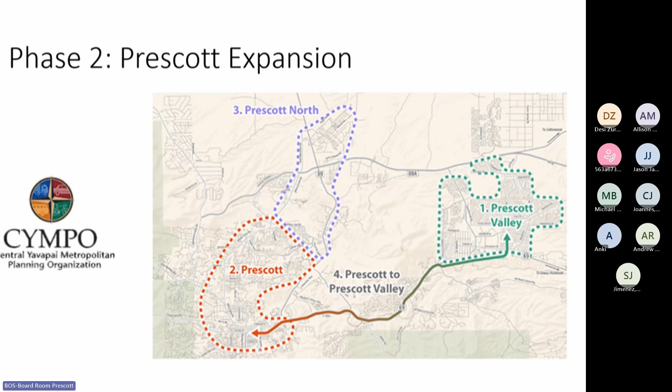So as I mentioned, this is the YavaLine Regional Transit System. The nickname is the Yav Connect. There's a little logo right there on the top right.

Our service is going to be the same as in Prescott Valley, Monday through Friday, 6 a.m. to 8 p.m.

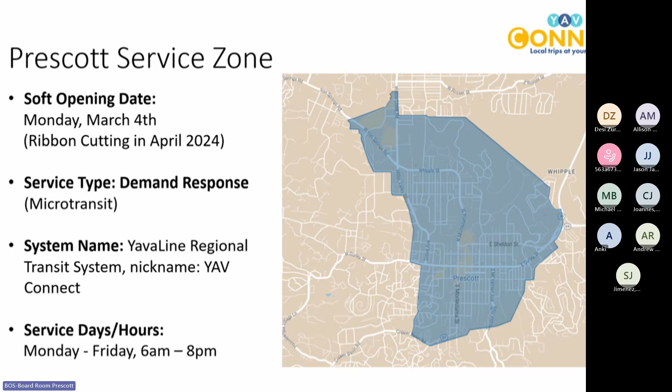Here's a little bit of our fleet. I know there's a lot of questions around the topic of the fleet and how big the vehicles are going to be. As you can see, it's very non-invasive, it's your average vehicle of 6 and 9 passenger vans. All of them are wheelchair accessible, ramp equipped, all to provide services for people with disabilities. So they're ADA compliant, and we're going to start off with 2 to 3 vehicles here in the zone.

Along with the demand aspect of it, or demand driven, is kind of the brains behind the service, which is the software. So right now we are running our service with Via Mobility. You can actually download it with this QR code and get the latest Yav Connect app.

This app is going to service both Prescott Valley and Prescott, and that's where people can request their trips, book their trips ahead of time or on demand. People can also call our service number: 1-866-YAV-TRAN. Here's just a couple more pictures of what that looks like to give you an idea.

As you can see, it's fairly straightforward. You put your destination in, credit card information, or you can pay on board. That's the other neat part of this, for those that are unbanked, they can pay on board via cash. So a little bit right there and book your ride - that's what our app looks like. So I'll hand it over to Leslie for some marketing information.

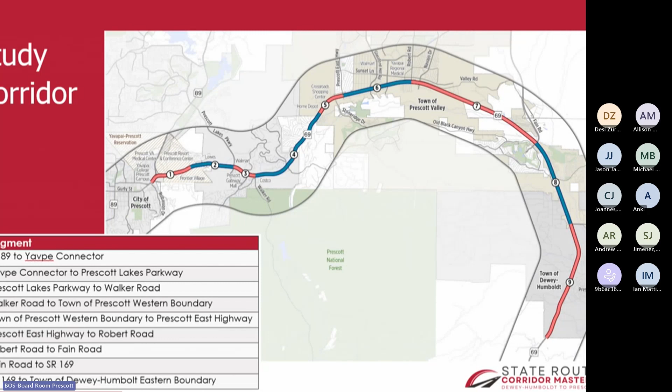So we ended up with 9 segments. I'm not going to go through every segment in the interest of time, but over the next few slides I'll touch on a few segments and what we've identified initially.

I also wanted to bring a regional perspective to this corridor. I know I'm preaching to the choir, but 69 is one of the only corridors that connects three different communities and the county. There is an alternative route from Fain Road to 89A to 89, but 69 still is the predominant corridor that provides access to a lot of the regional activity centers located along State Route 69.

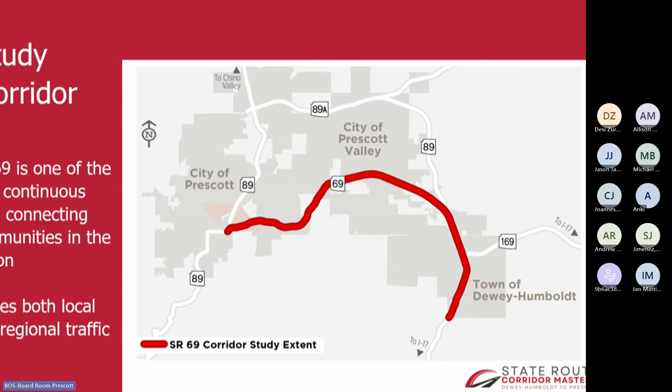For the next few slides, I'm going to summarize the existing conditions assessment in three aspects: reviewing land use and development characteristics along the corridor, travel patterns in terms of who's actually using 69 and where they're coming from and going, and finally the roadway inventory along 69 along with some initial analysis results.

Looking at corridor socioeconomic conditions, it's pretty diverse. There are high density areas up in the Prescott and Prescott Valley area, and some other areas along corridor segments 4 and 8. But a big chunk of the corridor is rural in nature or doesn't have much development along it. Where there is development, it's pretty concentrated.

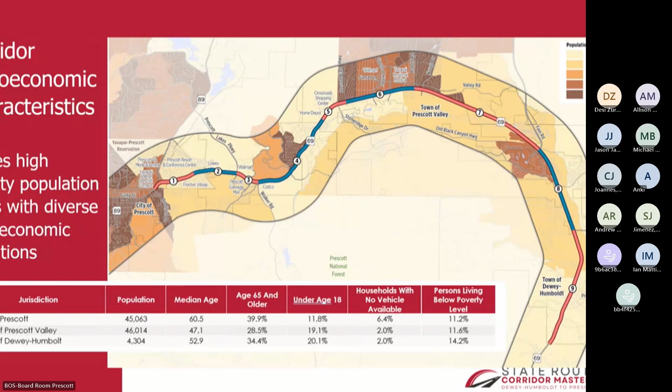We also looked at land use characteristics along the corridor, and depending on the land use, how people use the corridor varies. No surprise, there's a lot of commercial use in Prescott Valley along the front of 69, and the same in the Prescott area along the Prescott Mall and the west side. The key thing I want to bring up is the number of key activity centers located along this corridor: Yavapai College, Prescott Resort, Frontier Village, Prescott Gateway Mall, Costco, Crossroads Shopping Center, and Yavapai Regional Medical Center. These aren't just serving people who drive that corridor — they're regional activity centers, so people from throughout the region are accessing them. That's why 69 is so important.

With the next couple slides, I want to shed some light on how people are using 69, where they're coming from in terms of origins and where they're going in terms of destinations. But before I do that, I wanted to provide a snapshot of what the traffic volumes look like so you can relate the OD results a little bit better.

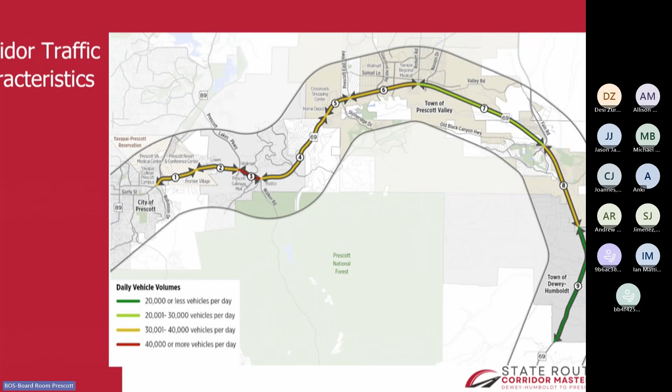Segments 1 and 2, essentially from 89 on the west to about Prescott Lakes Parkway, traffic volumes vary from 20 to 30,000. The busiest segment is between Prescott Lakes Parkway and Walker Road, where you have the Prescott Gateway Mall and Costco, and that segment carries well over 40,000 vehicles a day. The section east of Walker Road up to the Prescott Valley western city limits is about 30 to 40,000, and further east within Prescott Valley again about 30 to 40,000. As you go east of Navajo, traffic volumes start to drop to about 20 to 30,000, and further east of Dewey Humboldt to about 19 to 20,000 vehicles per day.

As we look forward to what kind of improvements we need, do we need to do everything on 69, or do we need to do some things on adjacent roads? That's the way we want to make sure we solve the problems on 69. Just merely addressing 69 may not help us get there, so we wanted to do a very detailed analysis on where people are coming from and where they're going.

We did this for all 9 segments, but in the interest of time I'll focus on 3. The first is the west end by Prescott, going from 89 to the Yavapai Connector. As you can see on the top slide, for folks going eastbound on this segment, 53% of that traffic is coming from the West Prescott area, to the west of 89. Most of that traffic is going towards North Prescott Valley, about 34%, and south of 69 in Prescott Valley, about 13%.

Another key metric is the amount of traffic that is regional in nature, heading towards Phoenix, about 9 to 10%. So there's a significant percentage of traffic that's regional, but also a significant amount serving local needs. At the same location, looking at westbound traffic, the pattern essentially flips. From the Phoenix metro area, traffic using that segment is about 9% again, but a lot of Prescott Valley folks are heading towards Prescott, about 36%.

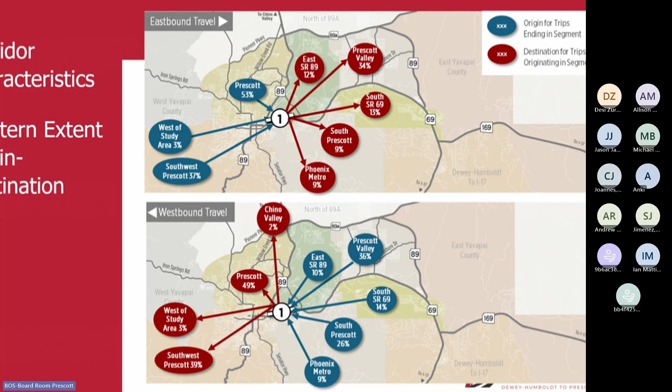How did you determine those? We used Replica, a big data platform. That database provides access to cell phone data and other sources to basically determine why people are making trips, where their origin is, and where their destination is. We divided the region along the corridor into 7 or 8 different zones, then within each zone we grouped all the trips and saw where they went. That's how we used Replica. We didn't have this level of technology and data before, so this helped us really hone in on where they're coming from and where they're going. Appreciate the clarification, I think it was important to touch on for the public. Thank you.

The second one I want to touch on is segment number 3, again one of the busiest segments by the Prescott Gateway Mall and Costco area, between Prescott Lakes Parkway and the Walker Road intersection. Still, as you're moving towards the east side of the corridor, there's a significant chunk of trips originating in the West Prescott area, about 45%, and they still seem to be headed towards Prescott Valley, about 37%. So what this is indicating is these are long distance trips, people going all along 69, a significant chunk making that long trip from Prescott to Prescott Valley.

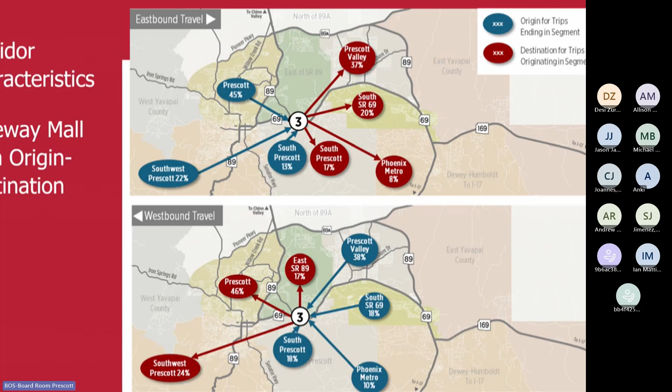Once we did the OD analysis, we also wanted to make sure what the traffic analysis is saying in terms of today's traffic. So we did an inventory of all the traffic control along 69, and there's about 26 traffic signals. Segment 2, east of the Yavapai connector, has 4 signals within two-thirds of a mile, and segments 5 and 6 have 7 signals within 2.2 miles.

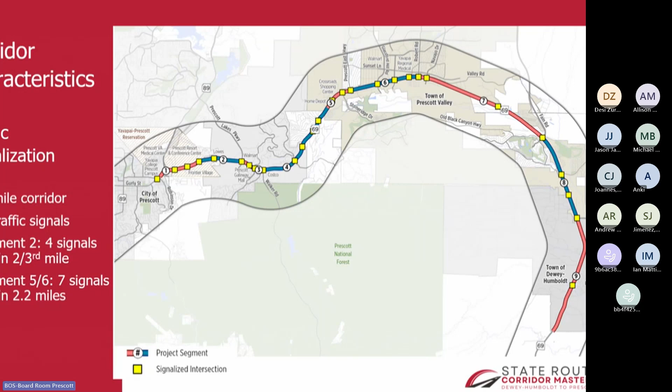Another thing on the signals is that several signals have very long cycle lengths, so especially for the cross streets, people seem to experience significant delays. Those are some areas that we could look at improving pretty easily.

Also, as I mentioned, we did the inventory of the corridor. We captured the number of lanes in each direction, as well as the medians. It's not consistent, it keeps changing from one segment to another, from 6 lanes to 5 lanes to 4 lanes to 6 lanes. It just varies significantly. What happens then is, as you're going from 6 lanes to 5 or 4 lanes, those become choke points and add to the problem. Our goal is to look at this even more carefully to identify bringing consistency for certain segments, what that would look like, and whether that would improve the situation.

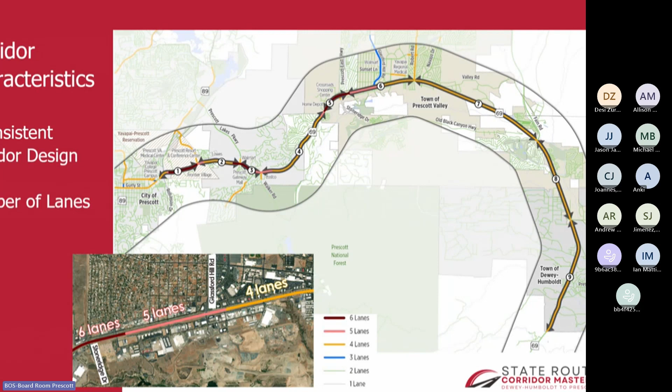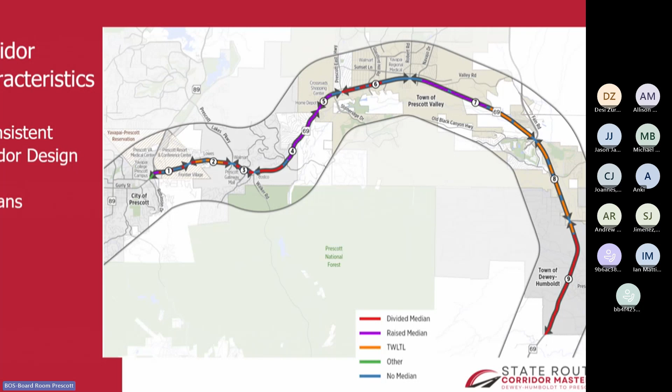Medians are another aspect, as you can see in that map. There are several types of medians throughout that corridor, and they're all inconsistent as well. So bringing some level of consistency for the medians throughout the corridor, focusing on some segments, making the medians very consistent, kind of improves the overall traffic flow. Again, that's low-hanging fruit that we could do to buy some time while waiting for the growth to happen and traffic volumes to increase further.

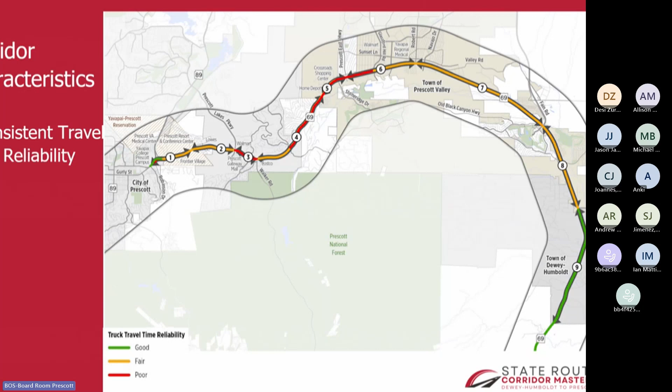We also looked at it from a truck standpoint, typically we look at whether the corridor is considered reliable from a travel time perspective for trucks. There's a pretty big chunk of the corridor where trucks consider that segment not reliable from a travel time standpoint, meaning that if it should take you 10 minutes, it takes you 20 minutes, and it's not consistent. That's what travel time reliability means. From a truck standpoint, it's classified by corridor segments, and some of them are classified as unreliable.

We also looked at safety data. A lot of it came from the NACOG, CYMPO, and Metroplan safety plan. Again, our focus was along this corridor, and we looked at the 5-year crash data.

There were 12 fatal crashes, 4 that were bike and ped, and 45 serious injury crashes. The safety plan identified two segments as high crash segments: Prescott East Highway to Robert Road, and Prescott Lakes Parkway to Walker Road. These coincide with the traffic volume data as well, being the two busiest segments along the corridor.

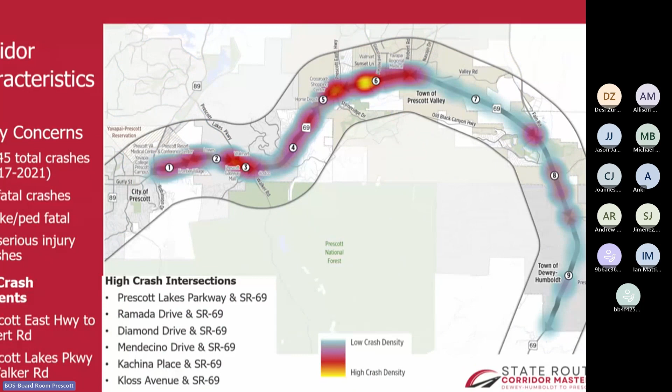Chairperson, if I can, please. Vamshi, we had two comment cards come in that I think this would be the most appropriate time to ask. One was from JD, who did not wish to speak, and one was from Joanne, who did wish, but they were both on the same point. This is as it relates to wildlife characteristics in the corridor. I know historically staff has tracked through the safety part of it, any crashes or fatalities related to wildlife. Could you speak to that from the safety standpoint, and is the planning process looking at any wildlife characteristics in the corridor?

Yes, that is a fatal flaw review that we will be looking at, to make sure we are addressing environmental concerns as we move forward. So we'll be looking at the wildlife corridors to make sure they're not getting obstructed, and the preferred alternative set of improvements will address both safety and environmental sensitivity. Thank you.

Again, we are looking at the corridor from a multimodal perspective, so we did an inventory of all the pedestrian and bicycle facilities along the corridor. While the map makes it look like there's a pretty good amount of walking and biking facilities providing access to the activity centers on either side, what's misleading is they're not fully connected.

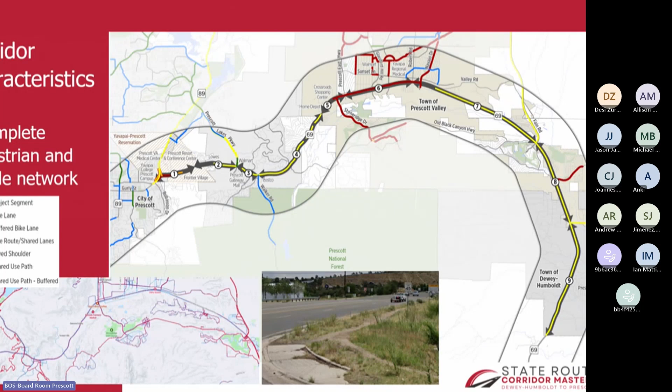So closing some of the gaps, like in sidewalks, shared use paths, or bike facilities, would make a huge difference in how people actually start using these for walking and biking. As we look at the final footprint for 69, we will also be looking at what we can accommodate in terms of sidewalks, shared use paths, and biking facilities.

That's a quick summary of our progress to date. We are wrapping up working paper 1, summarizing all the existing conditions analysis, and we've just started our future conditions analysis. As part of this, we'll do a lot of future modeling to determine the no-build scenario, then look at what kind of improvements will make a difference to address the issues. At the end of the day, we'll develop an action plan with a short, mid, and long set of improvements that CYMPO can champion after the project finishes.

I want to do a quick shout out for the community engagement that just kicked off. There are comment cards on the sign-in table, and folks can scan the QR code with their phone to go to the survey website. After filling out the survey, it takes them to an interactive map where they can provide location-specific feedback. With that, I'll open it up for any questions.

Thank you, Vamshi, that was a nice synopsis of what you guys have been up to. I admit I've been wondering how it's going, so clearly you've gone through a lot and looked at a lot of the data already. That's very much appreciated. I'm looking at the CYMPO website right now. For those who get home and forgot to scan the QR code, just go to the CYMPO website, and right at the top it says State Route 69 Plan, and on that page there's a link for it. So encourage it, share it with your friends, we're all looking for public feedback as much as possible. I know this project, along with the Sundog Connector project, has garnered a lot of public interest, so now's your chance, people. Appreciate it. Thank you, Dan.

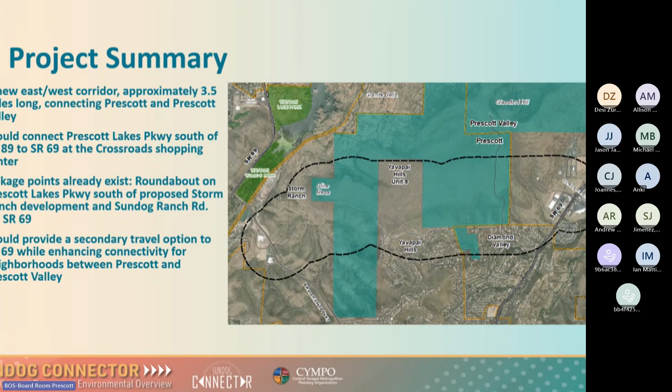When we looked at the process for this project here, we broke it into 4 different phases. We started with phase 1, which was looking at our existing and future conditions. We then moved into phase 2, where we came up with our different alternatives and evaluated each of those to determine what build type alternatives would make sense for the region and could be moved forward for further evaluation. After we moved out of phase 2, it was into phase 3, where the actual preparation of the DCR and the environmental overview took place. And then it takes us into phase 4, which is here today, the presentation of the plan.

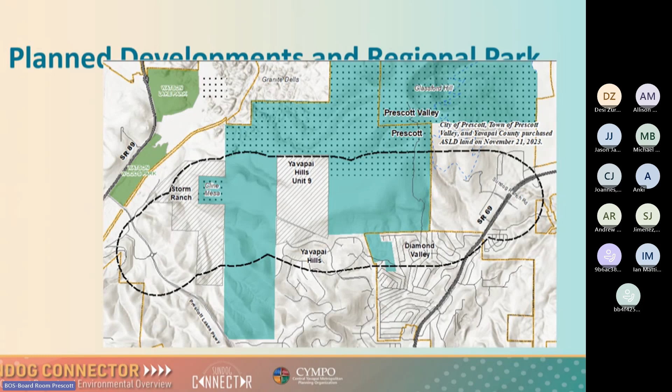So when we start talking about some of the proposed build alternatives that we could look at, and I'm going to turn it over to Kate here in a second, we talked about some of the tiered approach as we developed the build alternatives.

As those build alternatives were developed, we then went into a process where we evaluated each of the alternatives based on determined different evaluation criteria categories.

So looking at different items such as the natural environment, the built environment, traffic, accessibility, emergency access and evacuation, multimodal, vehicular safety, and any of the engineering or design constraints, costs, and overall public and stakeholder acceptance.

So with that, I'm going to pass it over to Kate to discuss some of the actual alternatives and how we move through some of that process.

Thank you, Matt. So as Matt mentioned, we started with 7 alternatives. There are a couple things that I do want to note that were on the last slide when we talked about the planned improvements and the planned developments and the planned proposed park. So those were all considered, as Matt said.

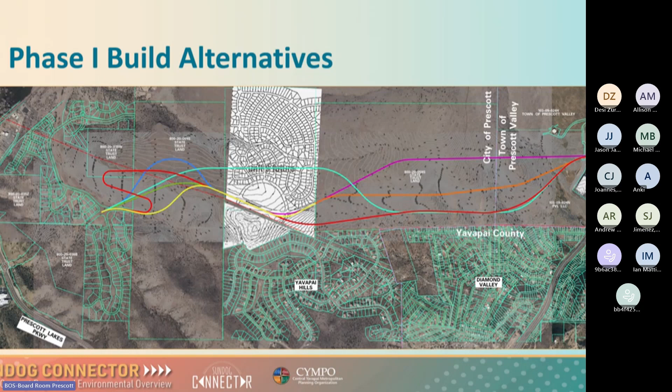We then took those 7 alternatives and did the evaluation. We did a lot of math, a lot of quantitative analysis. We have environmental concerns, and a lot of those criteria came from what we heard from the stakeholders and the public, which were key and would drive it. As you can see, alternative 1 and alternative 2 really fell out — the red or orange color is really poor performing. The best ones are in blue, so alternative 3 and alternative 7 are the 2 build alternatives that moved forward.

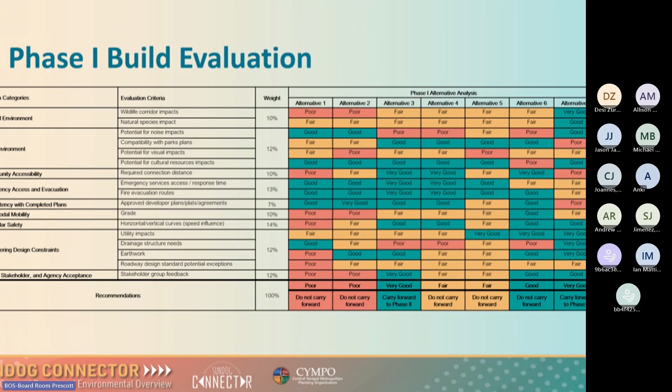Again, phase 1 was just trying to look at, if we build this, where is the most optimal position for it? Alternative 3 connects all the way through. Of the 7 alternatives, alternative 7 only went to the eastern end of Yavapai Hills, so it doesn't connect all the way through, but it would provide that connection to Prescott Lakes Parkway. So alternative 3 and alternative 7 were recommended to move on to phase 2.

In phase 2, when we first started, we took a step back and met with the technical team to figure out what the actual typical section should look like. Based on traffic volumes, and working with Vamshi — our SR69 team and the Sundog team are working hand in hand the whole time — we looked at what it would look like given end of traffic volumes. So we have a 4-lane section for phase 2, with a 10-foot multi-use sidewalk pathway on the north side, and a 6-foot sidewalk on the south side.

To be conservative with this approach on all alternatives, we used cut slopes and fill slopes on both sides — a max cut of 1.5 to 1 and a max fill of 2 to 1. That means we didn't consider using guardrail on some fills to steepen the slopes so we wouldn't go out as much, nor did we consider using walls on some cuts to avoid going out as far. We just treated them all the same. So to be conservative, all the build alternatives, including in the plans where we show the right of way, used this approach through the whole area. If it ever moves on to further design, that's something that would be looked at then.

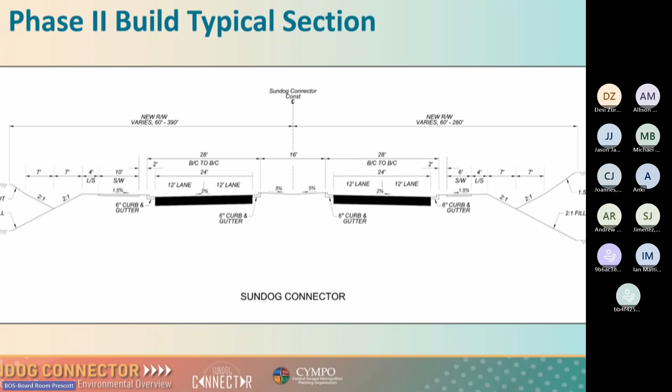For alternative 3, we also looked at the horizontal and vertical alignment and tightened those up, going into a bit more depth. We tried to pull it away from the existing homes in Yavapai Hills and Diamond Valley as much as we thought we could, while still getting the benefit of putting it to the south. The benefit of putting it to the south is in the vertical — we're able to stay within the existing topography and follow it more easily while meeting desirable and minimum grades. That's on the southern side, but we still tried to push it away from those existing backyards as much as we possibly could. That was part of this refinement.

The other part of the refinement you can see is the connections. Where do we connect? Where could those connection points be into the communities that are existing today? So the Yavapai Hills community follows the kind of plats that we've seen. And even if you look at an aerial where they kind of have the grading already done for south of it, is following those two lines. So that's where we are showing those connections.

With Diamond Valley, we evaluated where would it make the most sense to go into there. And that is actually one of the existing, there's a dirt road that comes out of there. And it seemed like it really connected the two sides of that community and an easy way to get out. And then it could be extended to the north to provide access to the utilities that are north of there.

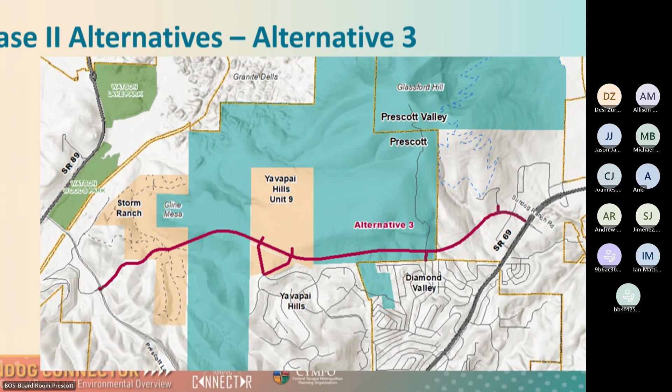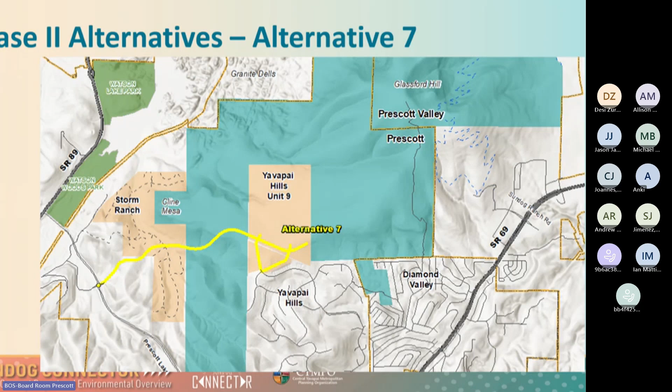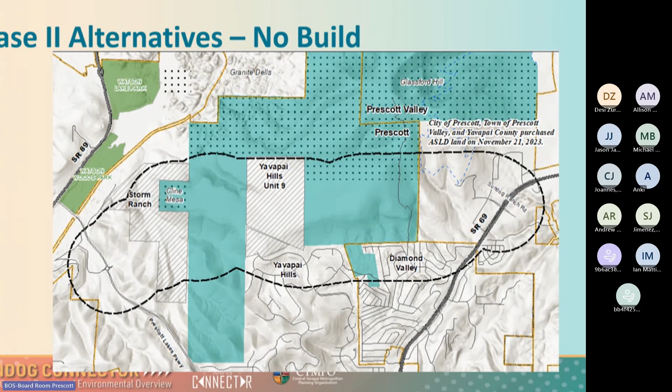So that's the refinements on alternative 3. On alternative 7, we did similar refinements, but really centered on the connections in Yavapai Hills itself with those same connections. And then the no build is the no build. The way we're evaluating it is a no build of the whole corridor that is not taking into account - this is just if those communities didn't move forward either, which we have no control of in the evaluation - what would it score in the different scoring?

So how we came up with that weight was through interactive activities with the stakeholders, which included members of the community, members of different agencies. Each of the towns and cities were represented in there. So from that, we did activities in our stakeholder 2 workshop, and that's where we came up and had them rank what would be more important, cost versus multimodal, and did a lot of that. So again, all of those activities that we did within the public and the stakeholder engagement were directly input into the evaluation and the process that we went through.

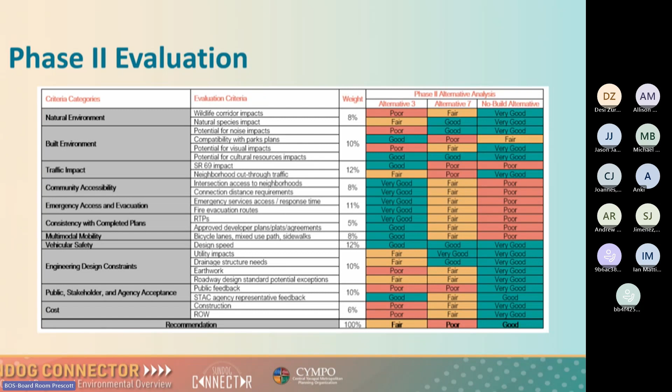So alternative 3, the opportunities. We're going to go through each of the two that were recommended and the opportunities and the constraints. So it most meets those future and existing regional needs, provides the largest reduction in travel times and volumes on SR 69, which I'll get into in a little bit in a minute. It provides the most direct connection along the western side. So when I mean that, it means between Storm Ranch and Yavapai Hills, it's up and over.

One thing with this, I will say, alternative 3 versus alternative 7 had a different connection in there. This one used cut, the other one used fill. And so the cut, you don't see as much as you would the fill, if that makes sense. And so it scored better, but it ended up being more expensive also. So that's just something, if this ever did go further, to consider.

So that's something I wanted to point out. It provides the opportunity to limit impacts and maximize connectivity to the proposed regional park trailheads.

We did meet with both the town and the city on the proposed park, asking if they saw the roadway as a benefit to the park, and which of the alternatives—we had all seven at the time—would be most feasible. Mostly it was on the eastern end that made a difference, where from a topography standpoint you could connect in and provide a trailhead. They did see it as a benefit for getting a southern connection and a southern trailhead, and that's what that bullet point is talking about.

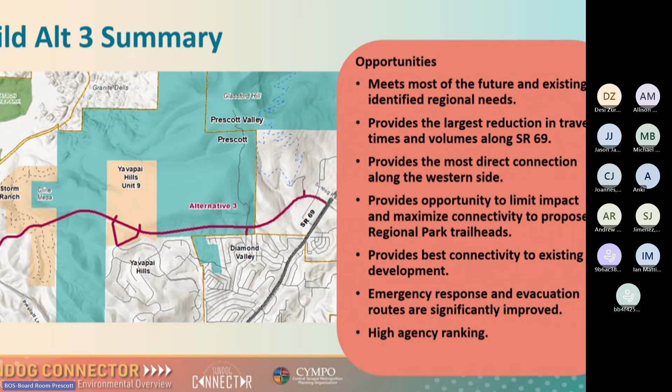It provides the best connectivity to the existing development. A lot of the other alternatives are farther away, so it's harder to get there—you'd have to build another road through topographic features to reach it. It also improves emergency response and evacuation routes, and has a high agency ranking.

As for constraints: there's about 500 feet of tall hillside excavation on the east side, and a pretty big excavation on the west side. So that connection between Storm Ranch and Yavapai Hills has a lot of excavation in there—it's a pretty big cut. There are some steep roadway segments, short ones, that exceed about 9% grade.

There's potential noise impacts—this is really directly from what we heard from the community and the public. They're concerned about the noise, so there are potential noise impacts due to the proximity of existing properties. There are also potential roadway design standard exceptions that would be required if implemented.

It intersects wildlife corridors—any build alternative will do that. The alignment is visible from multiple viewpoints in Yavapai Hills. And then there's a possibility for cut-through traffic—lower than alternative 7, but still a possibility.

The majority of the public input we received, the majority of comments, was not in support of this build alternative, or a build alternative in general. It's also the highest cost of the build versus no-build options.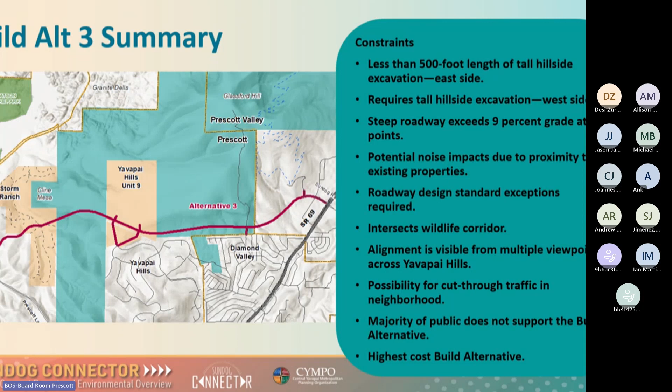The no-build opportunities: it leaves the natural land undisturbed, maintains current noise and visual characteristics, and maintains current wildlife corridor connections. The majority of public input we received supported this no-build alternative. There are no added costs for right-of-way or utility needs, since you're not buying right-of-way to build a road anywhere, and there's no possibility of cut-through traffic in the neighborhood because no road is being implemented.

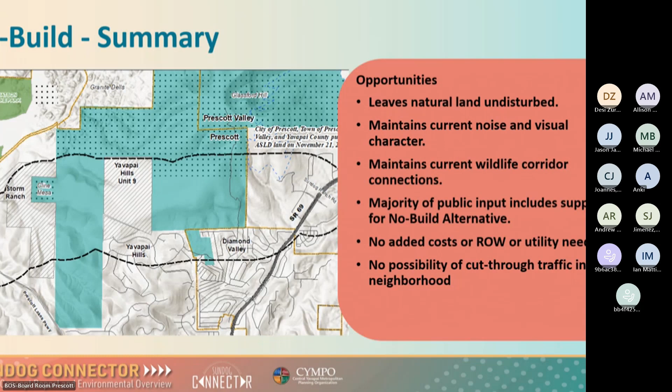Constraints: it doesn't address emergency response times exceeding the recommended standards, and it doesn't improve evacuation access. It doesn't address congestion in this manner—as SR 69 moves forward in that report, there will be other ways it looks at addressing that congestion. But in this manner, if no-build stays, it would not address that congestion.

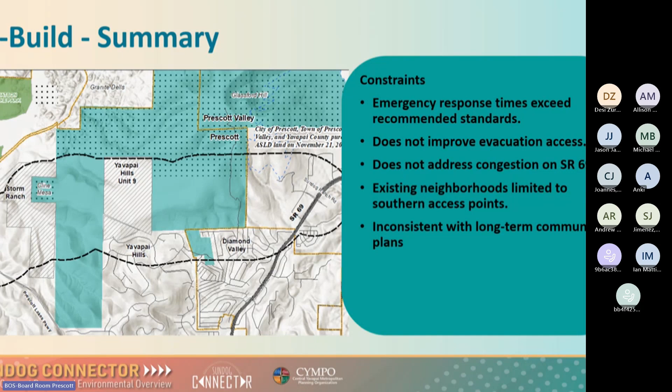Existing neighborhoods are limited to the southern access points—they can only get out through that southern access—and it's inconsistent with the long-term community plans.

So what does it look like? I showed it already, but here's a nice graphic. It has two lanes in each direction, a 16-foot median, a nice multi-use path on the north side, and a 6-foot sidewalk on the south side with natural landscaping, which is what's recommended if the build alternative ever gets implemented.

From a build alternative standpoint, it's recommended to be classified as a minor arterial roadway with a posted speed of 35 to 45 miles per hour. It has a desired max grade of 6%, with up to—though not quite reaching—10% for limited distances along the corridor. And as mentioned, a fill of 2 to 1 max and a cut of 1.5 to 1 max in that rock cut.

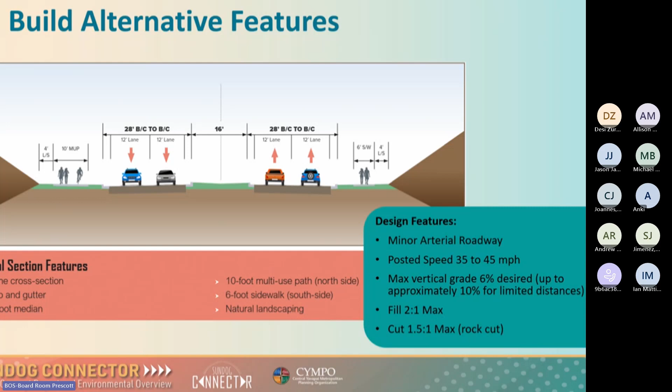Some traffic features - again, we're working hand in hand with the SR 69 study on what the volumes would look like. The models projected around 17,000 vehicles in 2050 would utilize it, and then there are daily projections on Sundog.

In some of the segments on Prescott Valley, traffic would go down from 20 to 25%. On SR 69, compared to the no-build, we're looking at a 20 to 25% decrease, I think around segment 2 or 3 - is that right? In your presentation earlier, around segment 2 or 3.

There is a slight increase in traffic north on SR 69 near the connection. That's because the connection not only takes SR 69 traffic but other routes too - people are taking Fain or using 89A to go around, which makes SR 69 north slightly increase because there's another way across now.

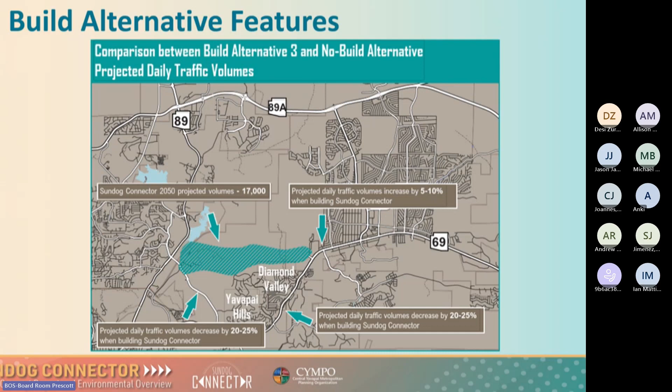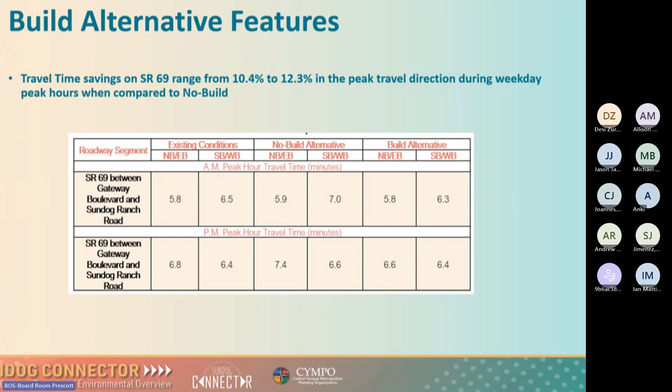We also looked at travel time savings in the peak direction of travel during peak time periods, ranging from about 10 to 12%. We looked at existing conditions, the no-build alternative, and the build alternative. The actual numbers show the build alternative brings it a little bit better than what we see out there today, but that comparison is for if we don't do anything. Other improvements will be evaluated in the SR 69 plan.

From a cost perspective of the build alternative, we broke this down into 5 segments. Segment 1 is from the roundabout to the eastern end of Storm Ranch. Segment 2 is between Storm Ranch and the extension of Yavapai Hills, and Unit 9. Segment 4 is from the end of Unit 9 to the limit of the town, and segment 5 is the town's segment to the end, using that jurisdictional limit between 4 and 5.

Segment 1's cost is approximate because we didn't design that area - you'll see in the plans that segment 1 isn't there, as it's assuming the design already approved and finalized for Storm Ranch. Segment 1 is around 32 million, including right-of-way and all costs. Segment 2 is about 67 million, segment 3 is 8 million, and segments 4 and 5 are around 20 to 22 million dollars.

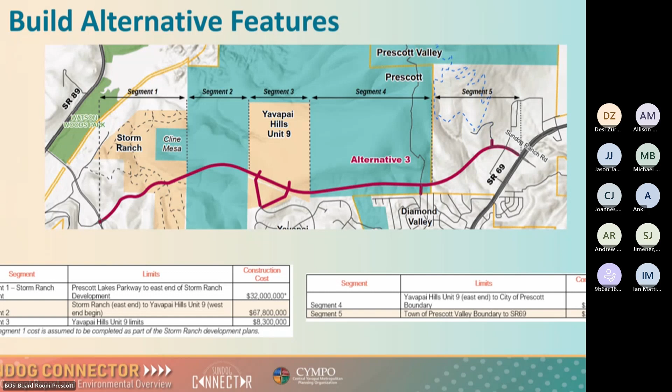An environmental overview was prepared, a big appendix in this report, to inform future environmental analysis requirements. The EO consisted of existing environmental conditions, inventorying them, and identifying any environmental constraints in the project. If the project ever continues, continued environmental review should be completed with any future project development phases.

For each of these alternatives, we did a viewshed analysis since visual impact was important to the public, some EMAC coordination, sensitive noise receptor screening in the build alternatives, and met with the park for both the town and the city for park compatibility review. We also did potential vegetation and disturbance review, cultural resource review, and wildlife habitat and connectivity review. The EMAC coordination especially helped since we got information from Game and Fish on the criteria they'd look at for wildlife, habitat, and connectivity evaluation.

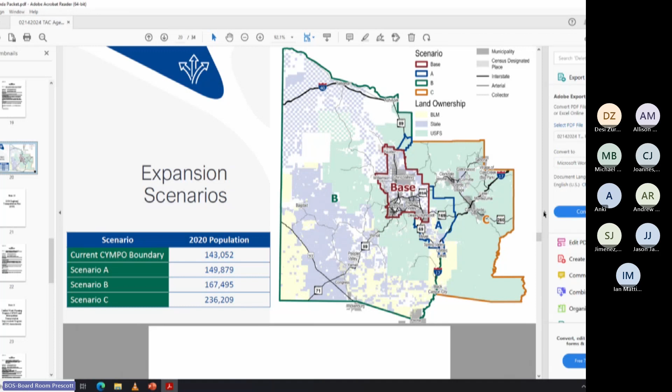We discussed at the retreat that this is a bit of a sticker shock from a land mass situation. When you start digging into the weeds, it's not that dramatic. When you look at the population currently, we're at 143,000. To take in option B would increase the population a little over 20,000.

More importantly, in this greater geography, we're doing the regional transportation network, looking at the I-40s, the 89s, the highway to the Bagdad mine, things of that nature. We're also looking at the movement of people, goods, and services—how is the mobility of people in southwestern Yavapai County accessing services in the greater Prescott area?

So with that said, today I'm looking for a formal action from you to go on to the executive board, giving staff direction to pursue the boundary expansion from, as currently recognized on this map as the base, to go to option B.

I will note in closing, someone—I think one of you—made a good suggestion at the retreat that we were cutting Black Canyon City in half by the I-17 line, and that adjustment has been made to encompass all of Black Canyon City. At this time, open to any other edits or changes, but we're looking to move forward with conversations with Federal Highways to make this official in the next few months.

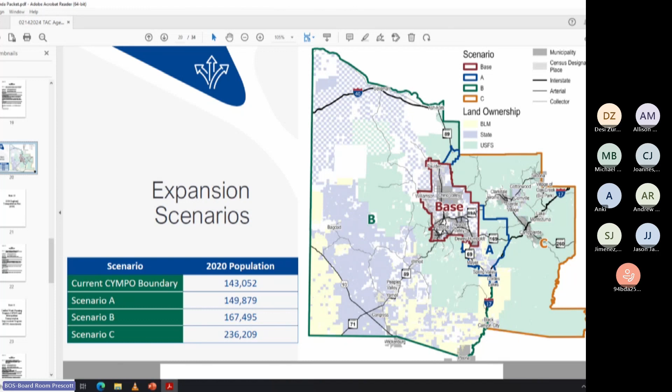Happy to take questions or comments. Comments from the committee?

Thanks, Vinny. I was the one that made that comment. Oh, great, I appreciate that very much because that's a community we work in pretty regularly. So I'd be happy to make a motion if you'd like one, Chair.

I'm sorry, Mr. John Hughes has his hand up too, Dan and Gwen. Or I'll defer to John first. John? I think he's still muted. John, you're muted. Can you have your hand up if you have a question or comment?

Sorry about that. I was just going to do a motion also to approve and recommend option B from the CYMPO boundary expansion study.

John, do we have a second? Second. Yeah, hearing a motion, a second. All those in favor? Aye.

Moving on to item 10, review, discussion, and possible action to recommend the consultant selection for the 2050 Regional Transportation Plan. Presenter Brinson.

Get some audio going. Thank you, Chair Roach, members of the TAC. You all, as our technical committee, are very well aware that the long-range transportation plan is the Bible we utilize to address regional transportation in the central Yavapai region.